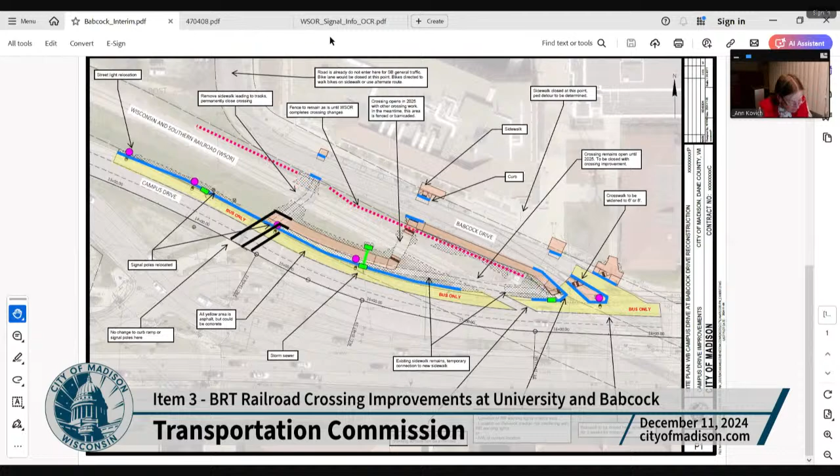All right, thanks much. So let's move on to item 4, which is the Safe Streets Madison Badger Road Sidewalk Project. Do we have anybody registered to speak on this, Aiden? We do not, no. Okay.

Mario, are you going to handle this? Yeah, I'll take this one. Let me go ahead and share my screen here. This is a Safe Streets project, the Badger Road sidewalk, near Park Street and Badger Road. There's a Burger King at this corner. To the west is the Park Street and Badger Road intersection. To the east is the new Black Excellence Center being constructed right now along Badger Road by the Beltline. This project is to connect these two, that new sidewalk with this intersection through the Burger King.

We initially budgeted this around $60K. It is just a sidewalk. But looking into the design a little more, we ran into a couple issues. Number one, that entire terrace is mostly private property where we need to go, so we're drafting an easement, and real estate folks said we have to buy the land for this easement. Based on the bank across the street that sold a few years back, it's going to be around $74,000 for that easement if those rates hold. Could be less, but we want to budget for the worst case scenario.

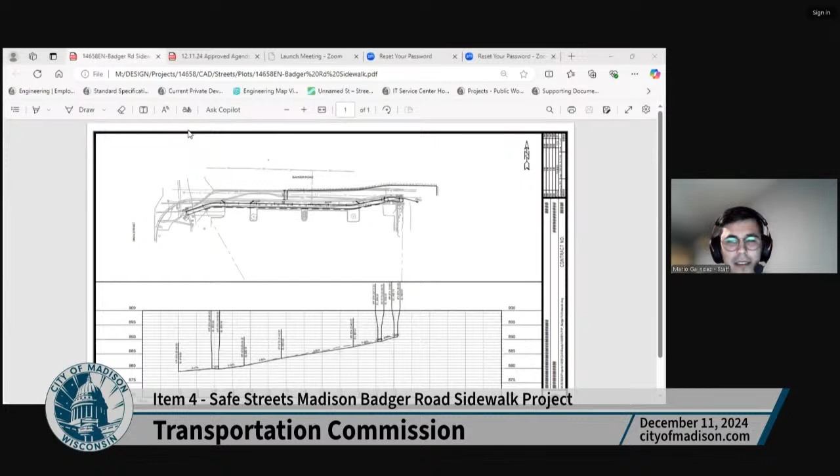I suspect, and Mario could confirm, that while perhaps we could narrow the approach and change the curve, that would probably just add cost right now if we're trying to retrofit something into what's there. So that's it, it would add cost.

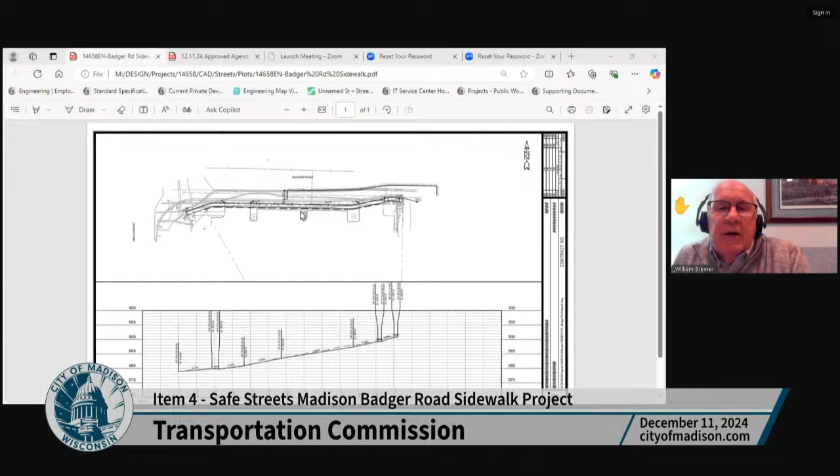Bill, go ahead. Could you just point out where the Burger King's lot line is on the east side? Is it at the top of the drawing, or is it right there? Yeah, right there. Is that their property line?

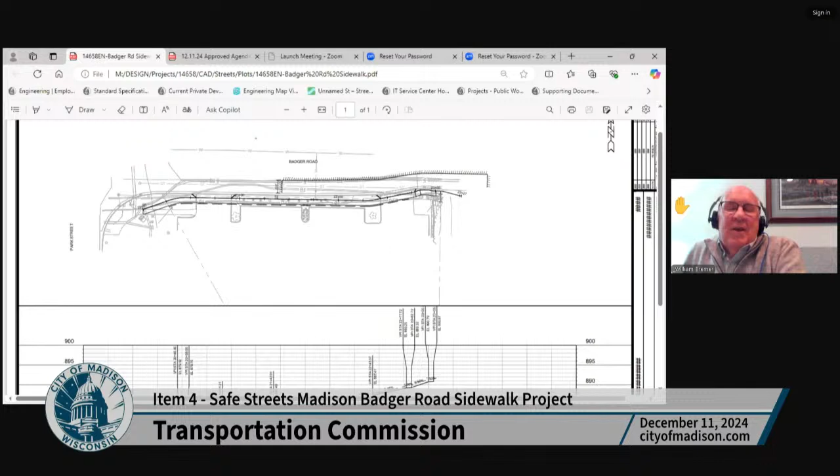Somebody's moving a cursor, I guess. Mario, are you in charge of the cursor? Is it at station 23+00, or very close to that, right there? Okay, all right. So, yeah, the sidewalk is gonna take up quite a bit of property. Yeah, thank you.

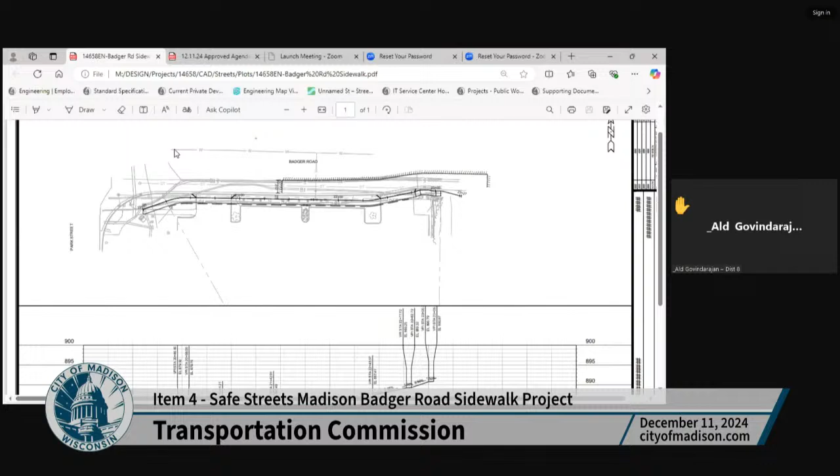Okay, other comments or questions? It seems like this is - Alder Govindarajan, go ahead. Thank you. I might have missed this if you guys mentioned it already, but where does the funding come from? Is this a general fund for this?

So this would come as additional funding from Safe Streets Madison. We would just need more than the 60,000 that came out, that was approved last year for this project. We would need to allocate 100,000-ish more. Okay, and it would come from the 2025 budget, correct? Correct. We have to do a full accounting for 2024, but it looks like that's all gone, so we would need the 2025 budget. Okay, thank you so much.

Capital budget, right. Harold, go ahead. Yeah, inspired by that question, would the project still have rated above the funding cut had the true cost been known?

So I would say this would be a little bit more like a couple of other big sidewalk projects, like we have one that we're doing over on the Stoughton Road frontage road to connect where the tiny house village is going, where it did score lower because of the way our scoring metric works for these projects. Once they get up over 120,000, they get a very low score, even if they have a high value. Okay, all right, thanks.

Bill, go ahead. Yeah, thanks. And I think I'm in favor of doing this project. I think it's necessary, particularly because we're having a significant improvement with the new center that's going in. I think it's absolutely critical that this sidewalk be in place when that opens, because we need to have pedestrians accessing both coming and going from that down to Park Street. I think it's critical, but it's a significant gap that needs to be filled.

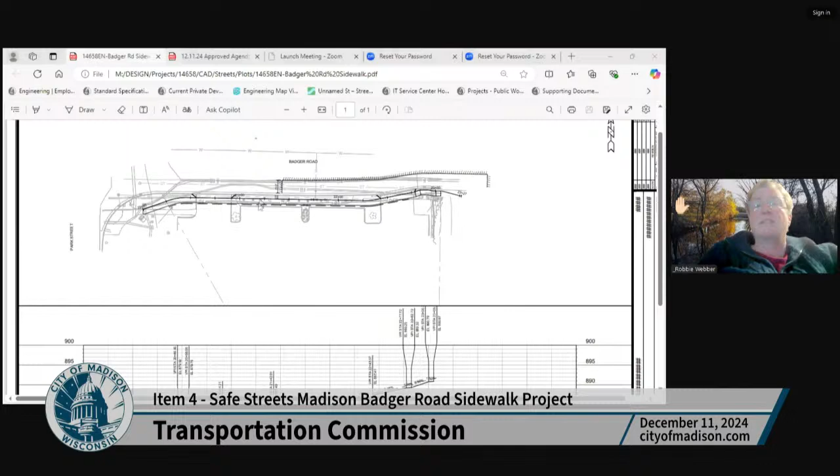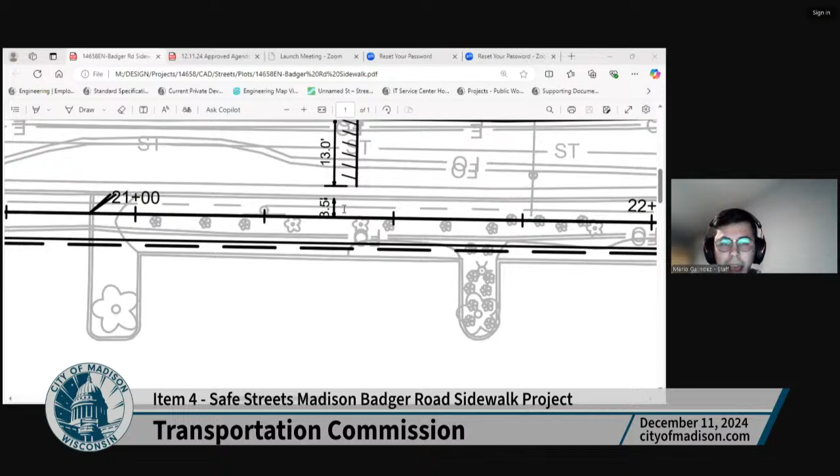Correct, yeah. Is the proposal to acquire some of the parking lot, or is the sidewalk going to be right next to Badger Road? The sidewalk is going to be about 3.5 feet off of Badger Road, basically right behind the curb. So we're still going to be within that planted terrace. It's all going to go away, basically, and just be a sidewalk.

But it will run through that terrace, and we won't have to take any of their parking lot. Oh, that's too bad. The reason I say that is that putting the sidewalk right next to Badger Road, I mean, it's better than what is there now, but it's going to be incredibly uncomfortable, I think, to walk so close to what can be a very busy road.

And I'm imagining the winter when plowing comes in and snow, slush, salt and gross stuff gets thrown up on the sidewalk, or you get splashed walking along the sidewalk next to the road. So anyway, I was just trying to figure out exactly where the sidewalk was going to be.

And it's really too bad that we can't, I mean, they've got such a gigantic parking lot. It's too bad we can't get some of their parking lot and move it to the other side of the planted terrace. Yeah, if we could take all of these spots here, that'd be great.

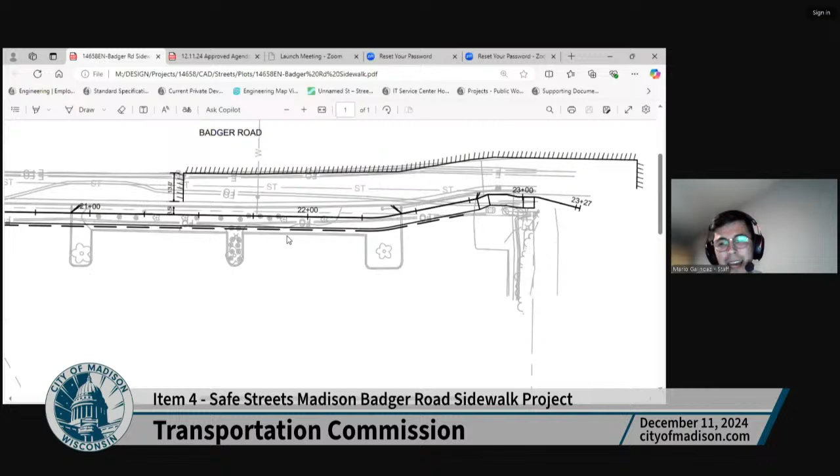I will say that it does kind of slope back pretty steep here from the street. So we'd have to kind of, we really don't like to put sidewalk below the street level, and that's what we would have to do. So I don't know if it would necessarily work, but in this case, I think the solution to the problem you're suggesting would be to bump out the curb into Badger Road, eliminate a lane, and just build the sidewalk the right way. But we're doing what we can, I think, in this scenario, unfortunately.

Okay, Chris Petykowski, you had your hand up? Yeah, just real quick.

We're trying to kind of do the minimum here to get the sidewalk in now. If we bought the full 8-foot terrace, we would be looking at damages for the parking lot and that sort of thing. So I do believe that if this property redevelops, then that would be the time when we would get our more standard terrace and cross section in there, typical section.

Yeah, I was just thinking about that, this might be some future redevelopment and we might be able to get something a little bit better. But thank you. Thanks, Robbie.

Pepe, go ahead. Thanks, Chair. I have a couple of questions. So, just like Robbie, this might be just me being really bad at reading this engineering plans.

But first question is, is part of the same project making or building, painting, etc., any kind of crossing across Badger Road, or is it only for the sidewalk on one side and connecting to the corner with Park and Badger?

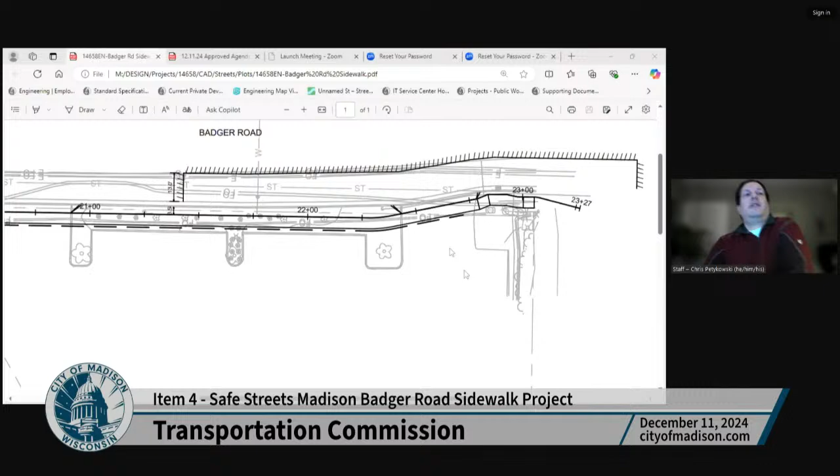Chris has his hand up. Yeah, so I think our long-term corridor view of Badger Road would be a multi-use path on the north side and a sidewalk on the south side, all the way from probably Fish Hatchery to Rimrock. And we'll be kind of implementing that through various projects.

You know, this is like one little piece of the sidewalk here. We have two TAP projects to build the path along Rusk Avenue and Rimrock.

And then we're working with the fire department and their project to the west of Badger Road to make sure that part is in. So over the course of 4 or 5 different projects, that would be the plan to build that cross section through.

Right, I remember a couple transportation commissions ago we looked at the one at Rusk and Badger in that corner. Remind me, Chris, did we talk about the sidewalk on the south side, or was that project focusing on the north side only? That was the north side only.

Okay, and is there still a missing link with no project accounting for that section, or are we hoping the new development takes care of that sidewalk on the south side? So between the Burger King and the Center for Black Excellence we'd get sidewalk all the way to the railroad bridge, and then we'd have to get it over, I believe, to our overpass.

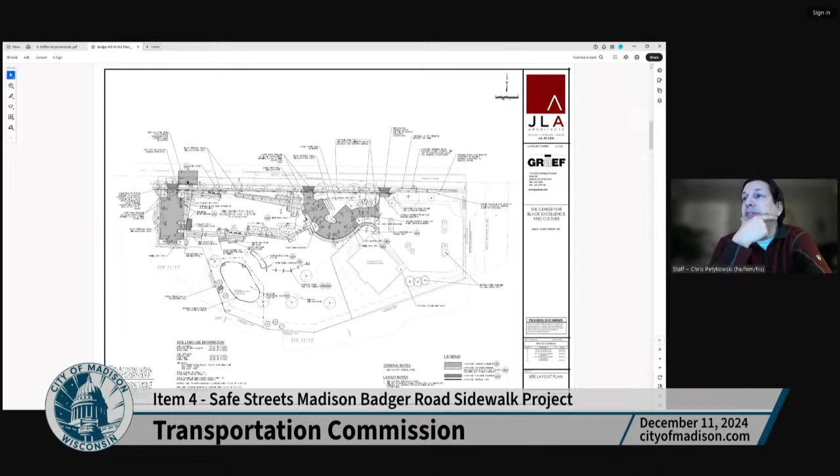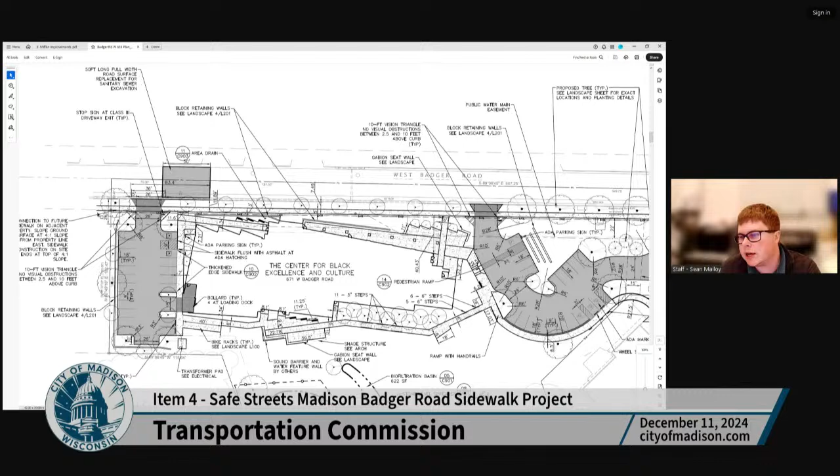This is the site plan from that development. This helps. So they're picking up sidewalks here ultimately, getting the sidewalk over to the overpass on the south side.

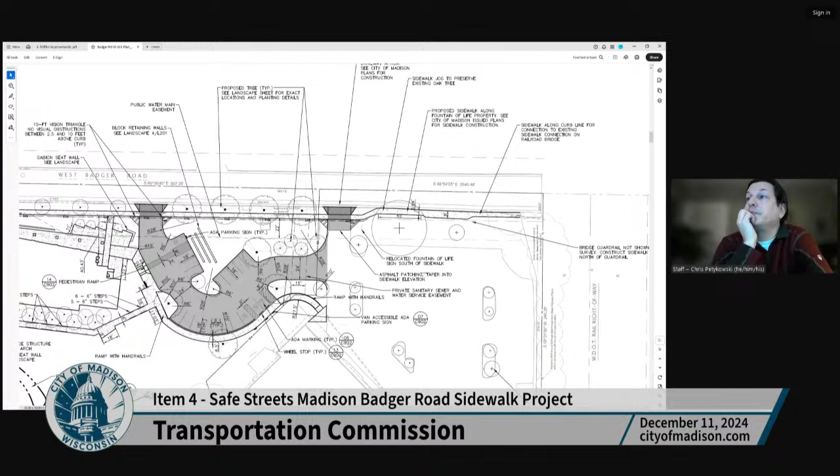Sweet. Yep, no, this is great. Awesome, thank you. Thanks, Pepe. Other comments or questions?

Because of the increased cost, we would need a motion to approve the project at the increased cost. Harold: I would move to approve the project at the increased cost. Bill: I would second that.

Okay, Harold, did you wish to speak to your motion? Yeah, this seems like an important gap filling project, especially with the new development happening there. And it's unfortunate that past decisions have made this more expensive, but it's still worthwhile. Thanks, discussion.

Okay, I'm seeing no hands. I'm going to assume a unanimous consent vote unless anybody wishes to vote no, abstain, or wishes a roll call vote. Okay, I'm seeing no hands, so the motion is carried. Thanks, everybody.

Okay, next item is review and approval of the TC annual work plan. I want to thank everybody for all the excellent suggestions we had back in late June when we reviewed this last time. It took a while to get back here for a lot of reasons, but as I went back through my notes and watched the discussion again, there were really thoughtful comments and excellent suggestions which have been incorporated into the changes.

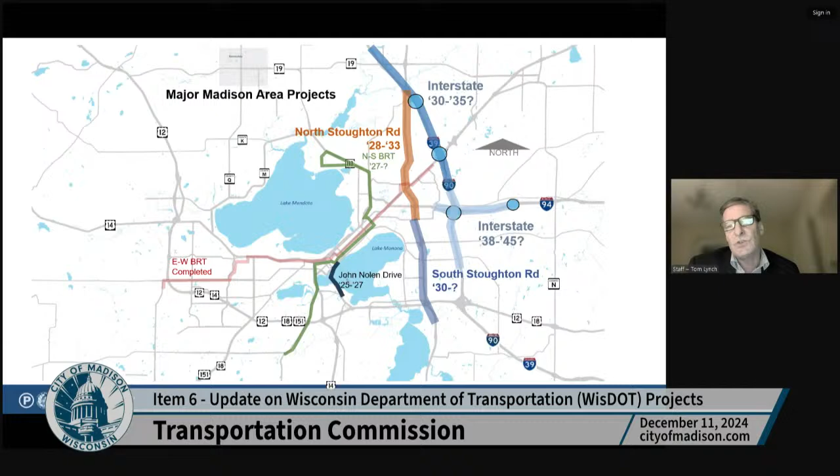But at least we can see pretty far down the pike of what's happening. North Stoughton Road is from '28 to '33, and South Stoughton Road is probably from '30 to who knows when. Let's start with the I-39/90/94 corridor study.

They just issued a final EIS for this project last week. It went before the Transportation Projects Commission Monday, and it was recommended for approval. It still has to be incorporated in the state budget before they can begin implementing it, but that will occur this summer. Key Madison area elements include...

Hoepker Road interchange, which many stakeholders in Madison, particularly in the American Center, really wanted. A revised 151 interchange, which I think I've shown you before, and you can see a picture of it here. While it's bigger and higher, it does introduce a more urban element for East Washington Avenue. So overall, I think there are some positive benefits to it.

A revised Badger interchange, and then a Milwaukee Street interchange, which would be in the 2040s. While much of this is way in the future, WisDOT would like to negotiate a cost sharing agreement for the Hoepker Road interchange in the first quarter of 2025. So that's pretty soon, even though this construction is way in the future.

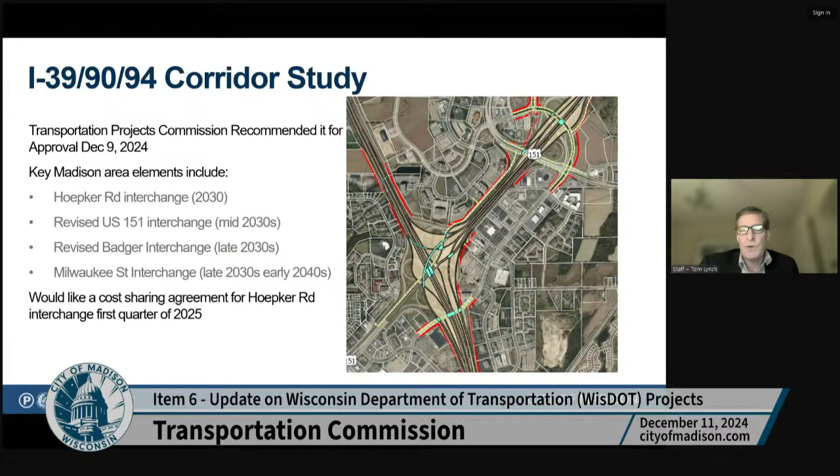The Hoepker Road interchange probably could occur between '28 and '32, and they would like to negotiate that. This is the recommended alternative there at Hoepker Road. Note that it just shows the interchange. And this project actually ends up being a bigger deal than just that interchange, right?

Because you have Portage Road, which is unimproved, that leads to the UW Hospital. And then you also have Hoepker Road, which is unimproved, which leads to Sun Prairie and all of that commercial area. So while they have a concept for an interchange, there's a lot of supporting infrastructure that goes on with that.

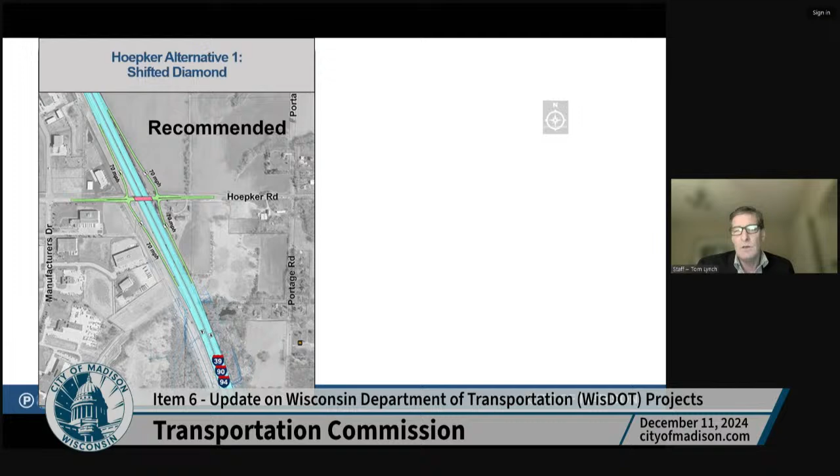The Stoughton Road North study - they released their environmental document, or it was signed last Friday, actually, I think Friday quite late. It also went before the Transportation Projects Commission on Monday.

It does not need the budget approval associated with the state budget like the I-90/94 project does, because it's part of their majors program, and it has a separate funding pot.

There may be things in this project that many perhaps might not like. However, I'm going to say that probably this project went as well for Madison as it could have. It could have been much more disruptive and had much higher impacts than it will.

Key elements of this on the North Stoughton Road, which is basically from Highway 30 to the north: there's one added lane in each direction. It has an at-grade intersection at the Stoughton Road East Washington Avenue - that was perhaps a major concession to Madison for that. They do have a separated shared use path on the east side of the corridor, except adjacent to the airport, and they have a grade separated ped bike overpass of East Washington.

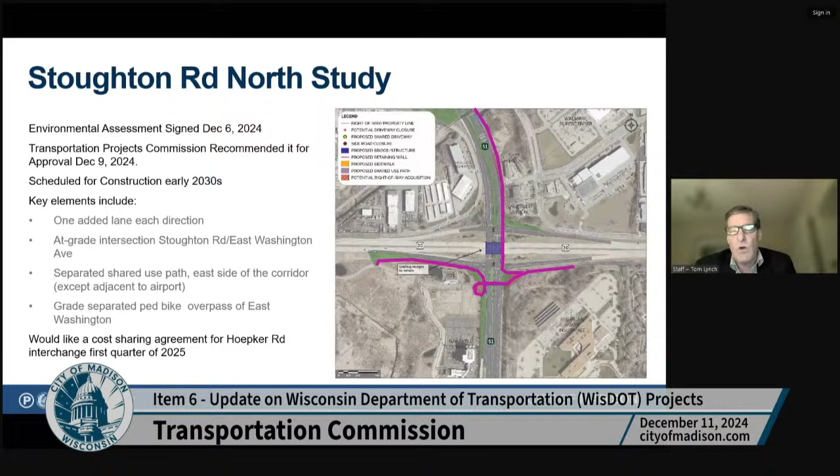So you can see on Highway 30, they have a grade separated crossing of Stoughton Road. Notice that they also have a path on the east side of Stoughton Road that leads up to East Washington. At East Washington, you can see that path that goes to the East Washington Stoughton Road intersection. There is a grade separated crossing, this one's above East Washington.

It curves down near where the Subway sandwich shop is, and then goes north. This has one added lane in each direction, and it's a rather large intersection. Compared to some of the other alternatives, such as diamond interchanges and the like, this one probably fits in best contextually to what Madison wants.

As I said, I'm not sure if I have another slide. I don't, so I'm going to go back up.

Tom, can we stop for a second? Tom Alderfield has his hand up. Yes, I can wait Chair if you prefer to take questions at the end, or I can go ahead and ask. Actually, I think I have a very small presentation on I-39/90/94 and a very small presentation on the Stoughton Road North study. The presentation on the South study is quite long and detailed, so this would be a good time to take questions.

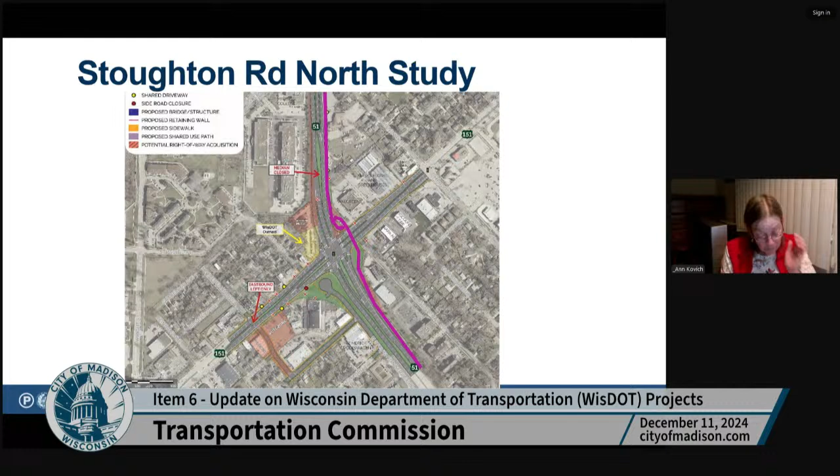As I said, WisDOT has been very focused on Dane County projects. We were hoping that after they got approval for the North Stoughton Road and the interstate, there'd be a slow period, but there's not. They're moving forward with the South Stoughton Road.

They had a public meeting that was very well attended for a Wisconsin DOT public meeting, I think two weeks ago at La Follette High School. I'll give you some information from that.

Right now they have about 5 or 6 conceptual alternatives. They'd like to narrow it down to 3 by this March, and then select a preferred alternative by August of 2025. And while that seems pretty far into the future, that's really light speed in DOT time, and light speed in educating the public about what's going on and how big these improvements could be.

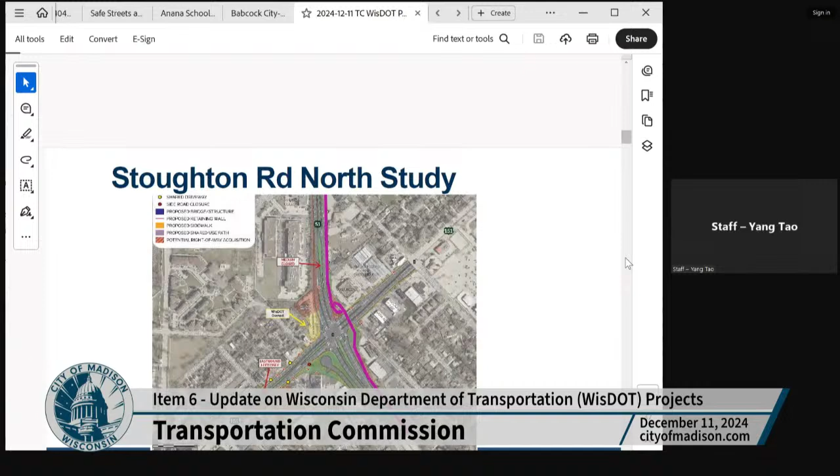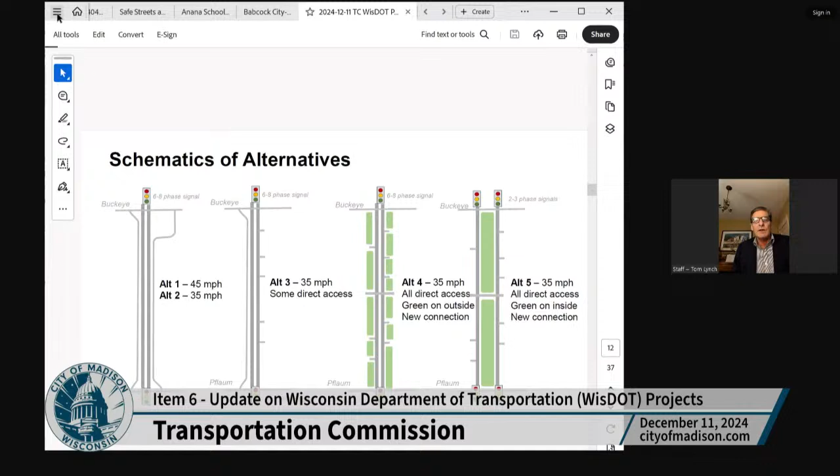Go to the next slide. Okay, so I was going to progressively disclose this, but there's really 5 main alternatives that they're studying. One of them is essentially the existing corridor, the way it is. On the left, you can see the schematic where we have a signal at Buckeye, a signal at Pflaum, and frontage roads on either side. The signals have relatively long signal cycles, like about 2 minutes.

Alternative 1 is at 45 miles an hour. Alternative 2 is at 35 miles an hour, giving a nod to some of the city of Madison's comments. Alternative 3 basically would keep the frontage road configuration on the west side, which would serve Blaine's Farm and Fleet and the like. But some of the lower traffic generators like Boomatic Pump, A to Z rental, and that kind of thing might have direct access on Stoughton Road.

Alternative 4 basically would create somewhat of a parkway, but it would eliminate the frontage roads, so we would have direct access. Businesses like Farm and Fleet or A1 Furniture or something to that effect would have direct access onto Stoughton Road. It would be 35 miles an hour, and the area taken up by the frontage roads would become open space.

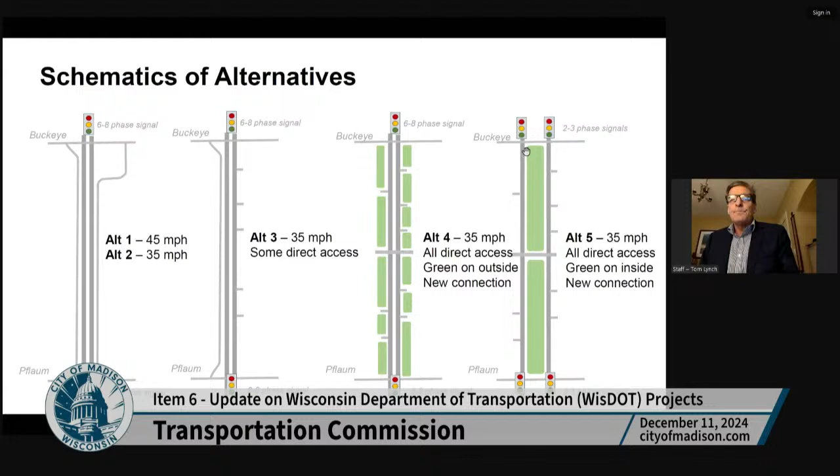This is a handout. When you want to try and figure out these alternatives, this slide provides a very good summary of the 5 alternatives being considered right now. You can see alternatives 4 and 5 both have direct access onto Stoughton Road. One places the green space on the outside, one places the green on the inside. Okay, next slide.

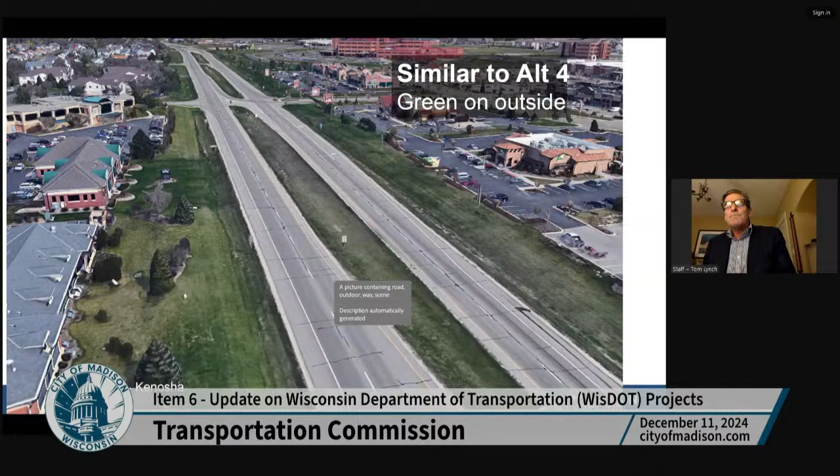This is similar to alternative 4. This one is in Bloomington, Indiana, I think it's called Miller Showers Park. You can see we have one-way streets on both sides with a path on the east side of the park, and then we have trees or something in the middle. Next slide.

This is something from a project I worked on when I worked for a different employer. I did the traffic analysis. This is Lick Run Greenway in Cincinnati, Ohio. It really functions kind of as a one-way pair, and you can see we have direct access onto the one-way pair with marginally spaced driveways.

In this particular feature, there's a drainage feature. I want to offer a taste of reality in that this is a beautiful picture, right? Probably we would not get something this attractive for Stoughton Road. We're probably not going to have a drainage way and walkways and the like, but we could have some type of green area that is more than a gravel shoulder.

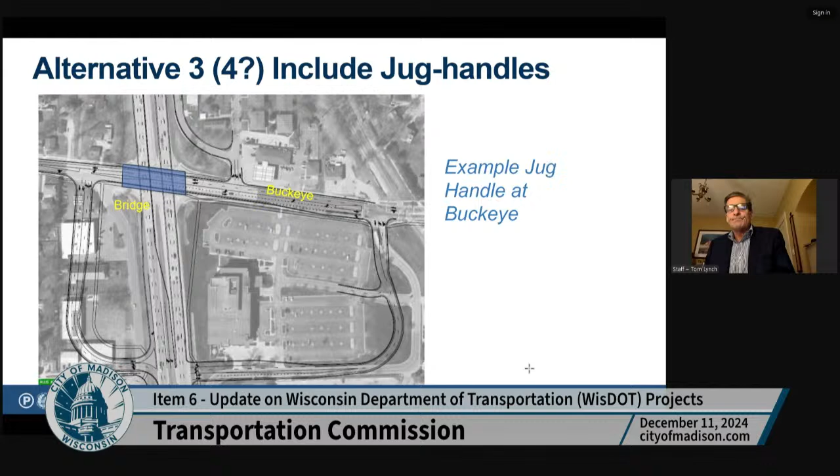Note that what the cross streets would do is make this into more of an urban street, right? But if you're in a neighborhood adjacent to Stoughton Road, you may not want all these cross streets. You can see how they would say, why would we want more cross streets? So there's a little bit of tension in that there's a desire to make this into more of an urban street, but a lot of adjacent neighborhoods are used to the way things are and wouldn't necessarily want to change the environment.

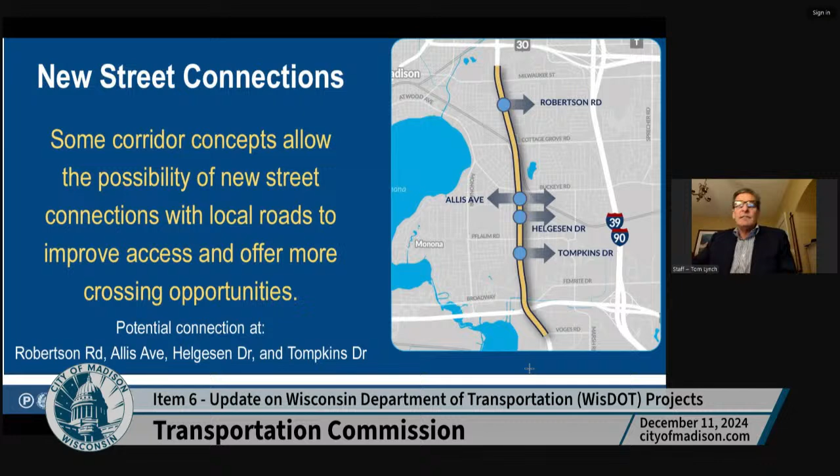One thing that was not included at the public information meeting, and we had hoped had been dismissed, was the concept of a super street. A super street uses a series of left ins and U-turns to eliminate the need to serve cross streets. So for motor vehicle operations, it's very effective at reducing delay on the main volume.

I think they can be confusing. I can provide a little bit more summary there with the next slide.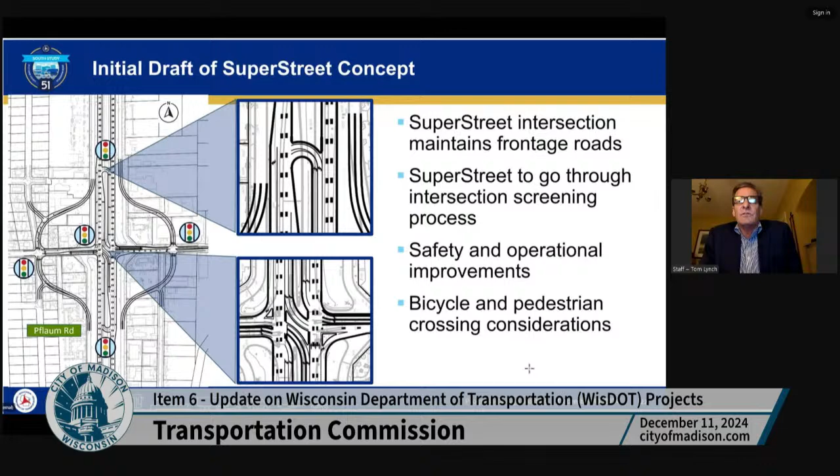This is a Wisconsin DOT slide. It would maintain the frontage roads. They say there's safety and operational benefits. There's also intersection benefits, or intersection considerations. Why don't you do the next slide, Yang?

I'll give you an example. I'm the father of 4 kids, and they're all out of the house and paying taxes and leading productive lives, and I'm glad for it. But I always think about what it was like when they were in high school. And so this is the attendance shed for a La Follette High School student, right?

You can see it in orange on the right. A student driving to school at La Follette, which is that orange rectangle, would travel west on Pflaum Road. They would take a right, then make a U-turn, and then take a right again.

So you can see that it doesn't cross. In some ways, I want WisDOT to be fair to us and the things we're asking them to consider, so I want to be fair to them as well. This does provide operational benefits, but in essence it almost separates the west side and the east side of Stoughton Road more, because you can't go across anymore.

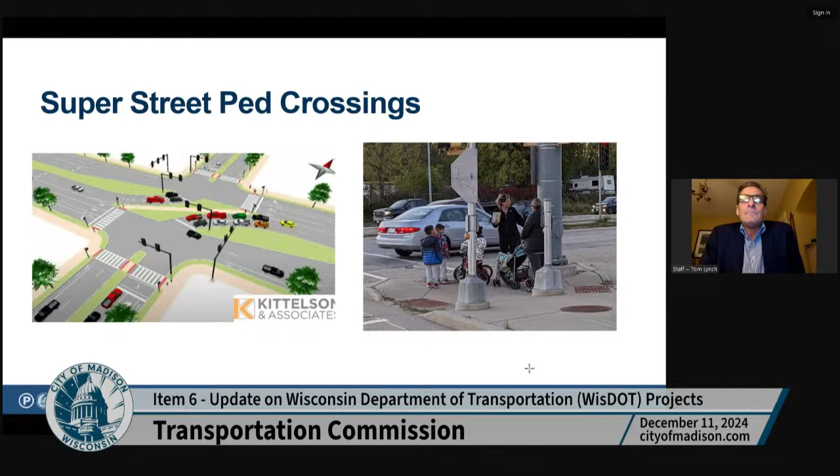Next slide. WisDOT and the public positions are really quite varied. Some can accept a lower speed facility, some are advocating for maintaining mobility. I'd like to say that WisDOT has given us unprecedented access into their process. We've probably been invited to anywhere from 15 to 20 design meetings for this project, which is quite a bit.

WisDOT is not a single body, it's a group of people, right? The people in the Southwest region are very accepting of some of our suggestions and responsive to that. There are some people in central office, more responsible for the full statewide picture, who have strong reservations about what Madison is asking for. Next slide.

WisDOT places a strong emphasis on what they get on these little Survey Monkey surveys. We think, oh, you got a Survey Monkey and you got this - that doesn't necessarily reflect the city's position, but I think WisDOT believes it really does kind of reflect what many people in the city think. This is a survey they conducted post-PIM.

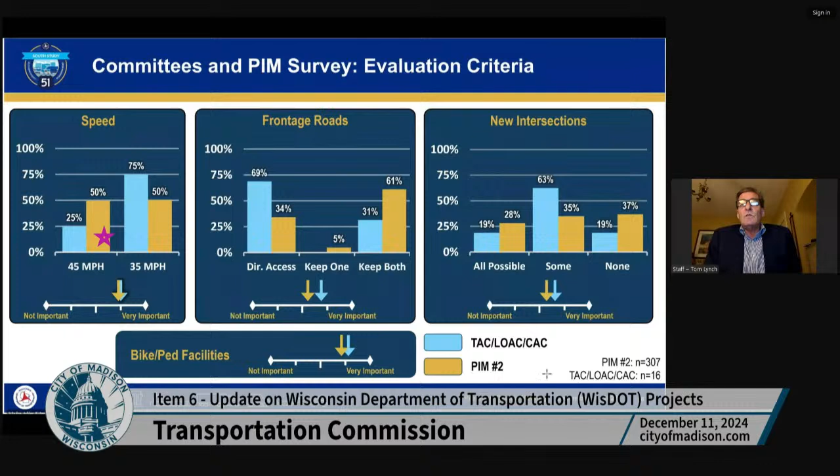This is interim results, not the final survey. Next slide, Yang. This survey is still open. You can take this, and I think that QR code will work. I developed that last night.

Like the Transportation Commission, you guys have a voice in what happens in Madison transportation, right? So if you feel like there's value in having a slower Stoughton Road, I would encourage you to take the survey, because as a Transportation Commission, you probably understand the transportation issues facing Madison more broadly than someone who is just used to seeing transportation from a small portion of the city. We will probably respond to WisDOT on these alternatives in an official capacity, but they do place a lot of emphasis on what these survey monkeys show. So I would encourage you to participate if you have feelings regarding this. Next slide.

The staff recommendation right now is that we've been advocating for a slower, more urban facility. We believe that alternatives 4 and 5 probably have the greatest potential to meet this objective. We might have a slight preference for alternative 5 just because having 2-phase signals, that one-way pair, is kind of an attractive operational concept, but we could see 4 as well.

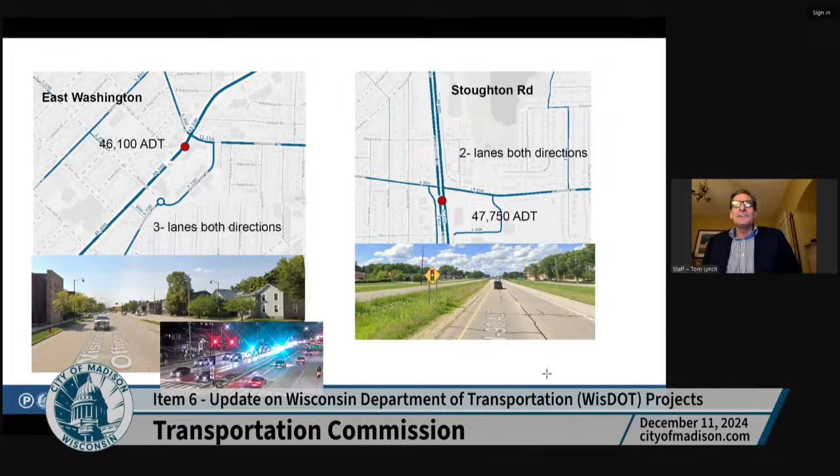And then we have a bunch of exercises, which we're not going to go into. So if we could go, Yang, to that one slide that shows all 5 alternatives - that's probably a good one to have up on the screen while we answer questions and have discussion.

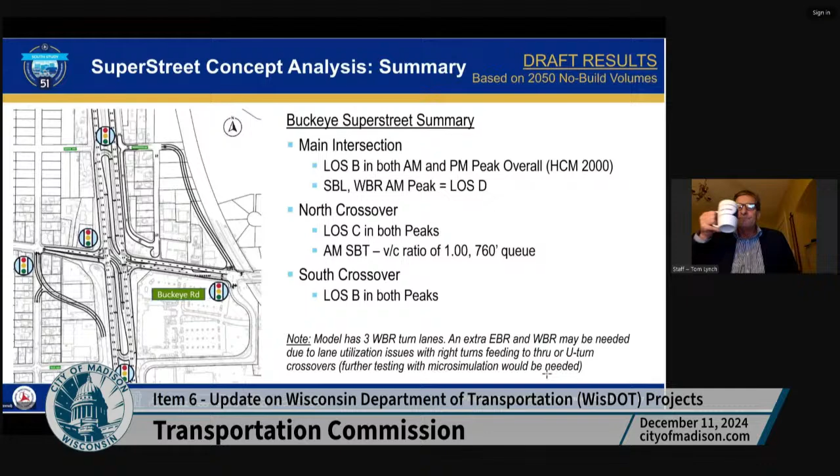Okay, why don't we hear from the public first, Tom? That'd be fine.

Aiden, who do we have registered to speak? Gabriel Hill of Presidential Lane neither supports nor opposes and wishes to speak.

Hello, can you hear me okay? Yes, we can, go ahead. Hi, so my comment is mostly in regards to this South Stoughton Road part from 18 to 30.

And all the options seem pretty bad. The no build option, option 1, and option 2 all don't address what I think - I don't want to put words in the alders' mouths, but I think they talked about more just a desire for connection across the road between districts. I had it pulled up.

Then alternates 3 and 4 just turn Stoughton Road into a design similar to the roads that consistently appear on our high injury network. It would create way more conflict points, both for turning vehicles and pedestrians, just in general. Options 3 and 4 would turn it into kind of another - I want to say like East Washington, where it's prevalent on our high injury network.

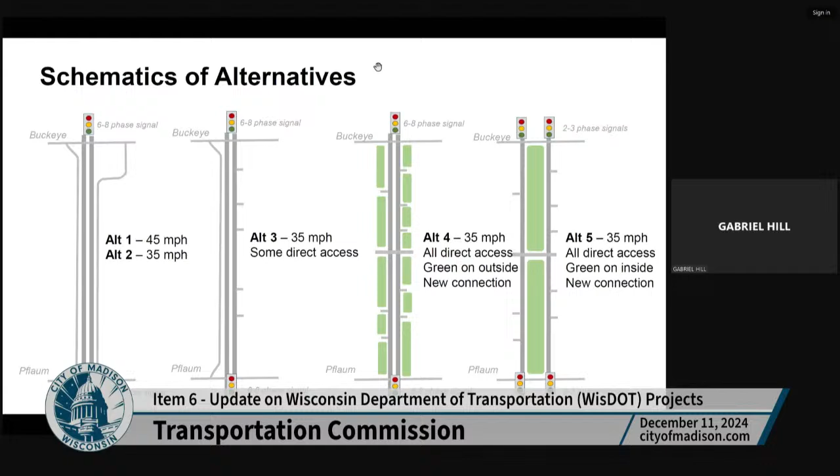What I'd like to see as a goal for this area is to try to bump any through traffic out to I-90, where it really needs to be. Like if you're going from, say, Stoughton or McFarland, and you're going north of Madison, you really shouldn't be taking this road. It doesn't make sense to have it go through the city when we already have a bigger, better, faster road that is almost the same time right nearby.

I'd also like a goal to allow the interconnectivity across the road that the alders have asked for - again, I don't want to put words in their mouths. Keep the safe street and allow space for local trucks to still have access to businesses, and reduce the size of the road to a size that fits the needs.

Now, I'm not a traffic engineer, but I think reducing the speed limit to 40 or less would be great - this would make Google Maps route people up to I-90 if they're going through. A reduction to 1 lane in each direction would be great. And on Pflaum and Buckeye, add grade separation, like was talked about in the project - that would be excellent. Or if that's too expensive, then the truck-friendly roundabouts that we see out past the Beltline on Mineral Point that they added. I don't know whose district that falls under, if that was us or the state that added that.

But also narrowing the frontage roads could be done. Nobody really parks on those, and the traffic is minimal for their size. I think Dutch-style frontage roads could allow for better access to the businesses for both trucks and customers.

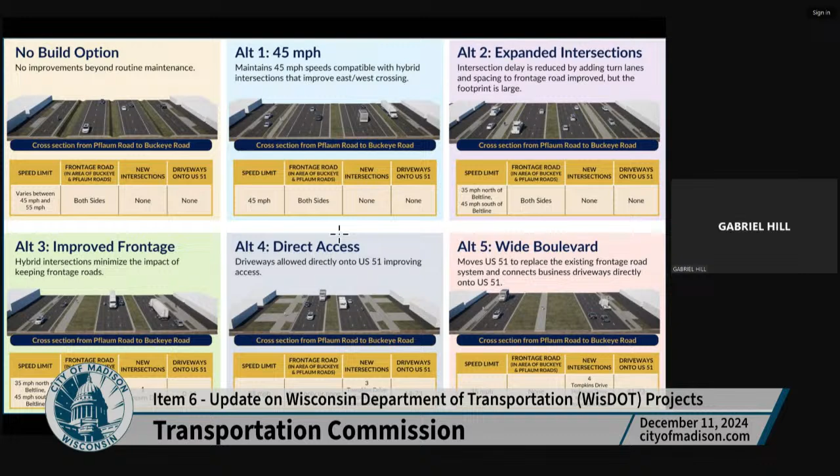Sorry, I have more - yeah, but my time is up. That is your time, thank you so much.

Questions for the registrant?

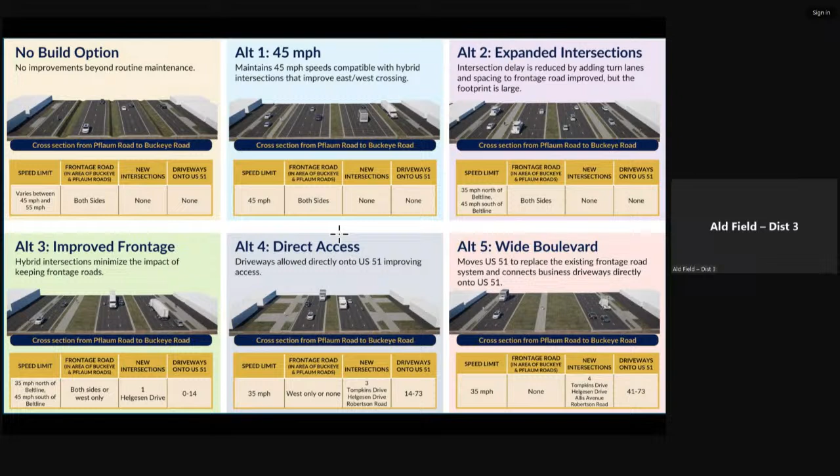Okay, I'll probably start an email thread between Chris, yourself, and I, and talk through this more. Thank you, Tom. Thanks, Alder. Alder Martinez Rutherford, go ahead.

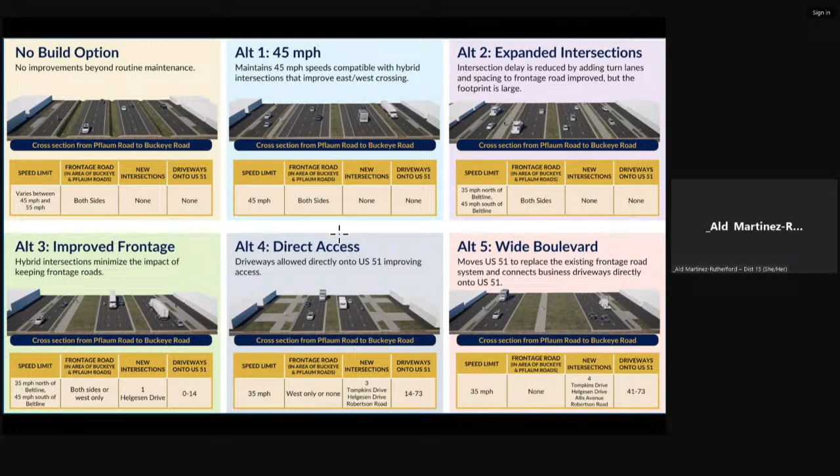Yeah, Tom, I probably missed this because ADHD and everything, but the only place that I really saw pedestrian infrastructure was when you showed the super street, which seems terrible, by the way. But I'm mostly concerned about getting students across the street safely back and forth, especially around Pflaum. Are they taking that into consideration?

Yeah, so I'll talk a little bit about it. All of the alternatives will have much better longitudinal bike-ped accommodations, and they will be protected. I think they haven't developed them exactly, but they would be consistent with all ages and abilities, right?

I think the cross streets, what you say is correct. That's more challenging. When you have an at-grade intersection, it's very difficult to get students across, or any pedestrians across, right? If you have a jug handle or a grade-separated intersection, all of a sudden the conflict exposure is quite a bit less. But then all of a sudden you have a different type of facility, right? You have something that borders on an expressway, not an urban roadway.

So I'm going to say the executive branch of the city has tended to prefer more urban, at-grade solutions. Both are kind of things that could be explored. Easier crossing for peds and bikes if you have a jug handle, but then all of a sudden you have an expressway type of facility.

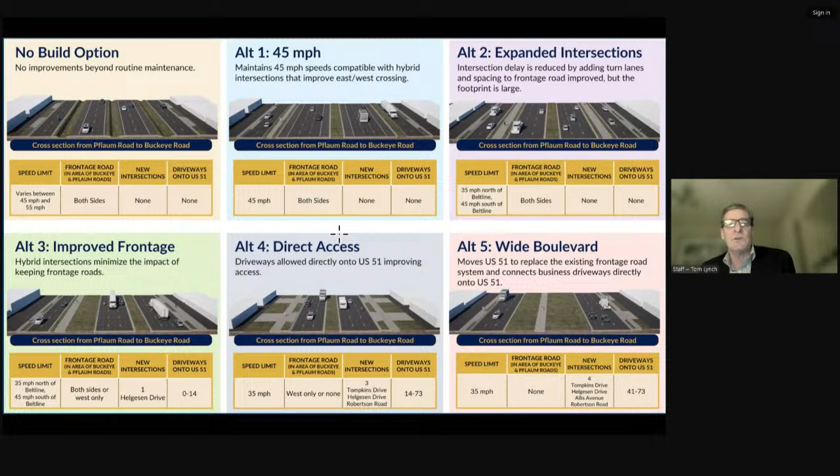Which I guess if we had our druthers, that's not a bad thing for us. Having less traffic volume in East Washington is probably better because we have more urban concentration there. So thank you for allowing me to address those.

Yeah, no, helpful information. Other comments or questions for Tom? And feedback on what you prefer. Harold.

Yeah, thank you. Lots of projects, lots of material to digest. I'll start with the North Stoughton Road study. Can you clarify the bike path? You said there will be a bike path, but there will not be one along the airport. Is there a map of this to figure out?

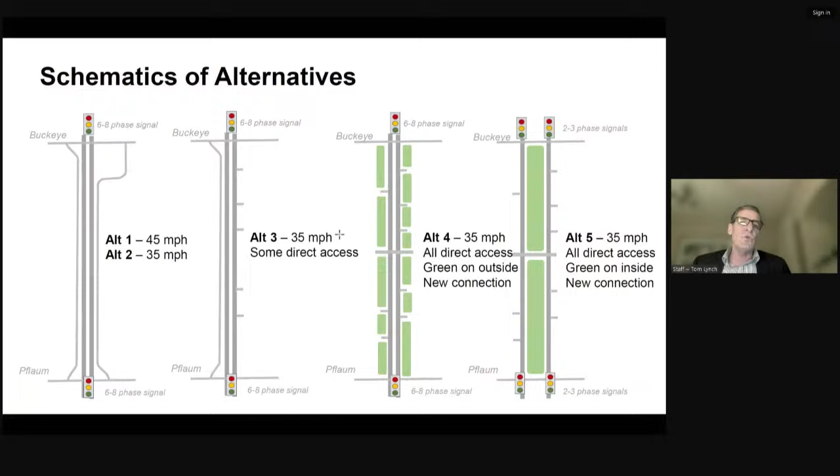There is, and if you email me I can perhaps provide you that. I think we have consistently said that we wanted to provide a path adjacent to Stoughton Road, similar to what occurs on Highway 12 to Sauk City. It's not a great place to bike, but it's a safe place to bike.

The airport has consistently said that we can't have a path because it introduces a new use. It's been our position that there are already pedestrians and cyclists on Stoughton Road, particularly in the runway clear areas, because UPS has a new facility on North Stoughton Road with shift work, and people sometimes have to walk to that shift work, which is terrible.

I think federal agencies have deference to federal agencies, and so the Federal Aviation Administration has kind of said to FHWA that you can't do this—it violates our standards, and so we are not going to allow that. That's what the airport has said. We have not been able to push that because of the current dynamics with the airport, the county, the city, and the state.

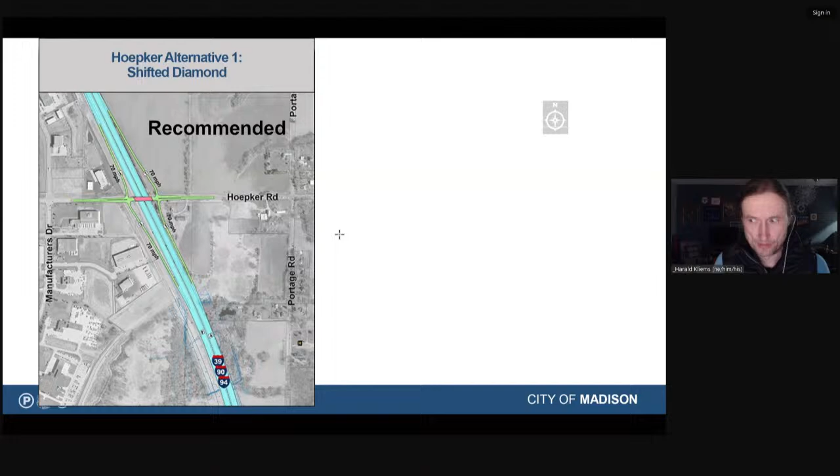Next, so Stoughton North is also adding a lane, a general travel lane. Is that correct? It is, yes. Even though volumes are drastically lower, and even WisDOT's often optimistic projections for travel volumes say it's going to be like 20-something thousand, and they're still adding a lane. Actually, I think it's much more than 20,000.

I'm writing down airport in my notes just so that, but I'll still forget. So you still should email me. Will do.

I think Wisconsin DOT's first the traffic forecast—we like to blame it on Wisconsin DOT, but really they're our traffic forecasts, right? They are prepared by the Madison Planning Organization, which is kind of separate, but underneath the city of Madison. The people that prepare those traffic forecasts are competent, they do their job well. I think what happens is that the city of Madison is willing to live with more congestion than what Wisconsin DOT is willing to live with, as well as what FHWA is willing to live with. Whereas we are saying, well, if there's a roadway in the border, if we can reduce capacity, the city of Madison will say, let's see if we can do it, maybe it's not that bad.

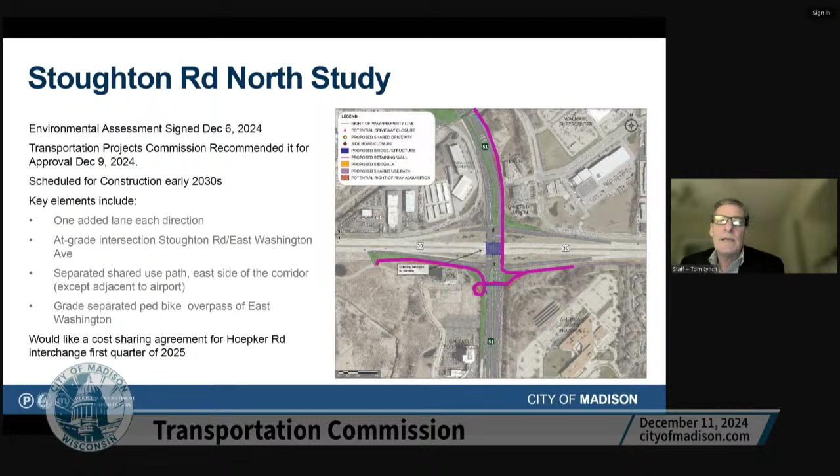I'm not sure if I have a detailed PDF of the proposed lane configuration. You can see even with this graphic right here that came out of their environmental document, it's somewhat pixelated, so it's difficult to see exactly what's happening. But right here, if you zoomed in, you could see that we have 3 lanes in both directions, not 2 lanes in both directions.

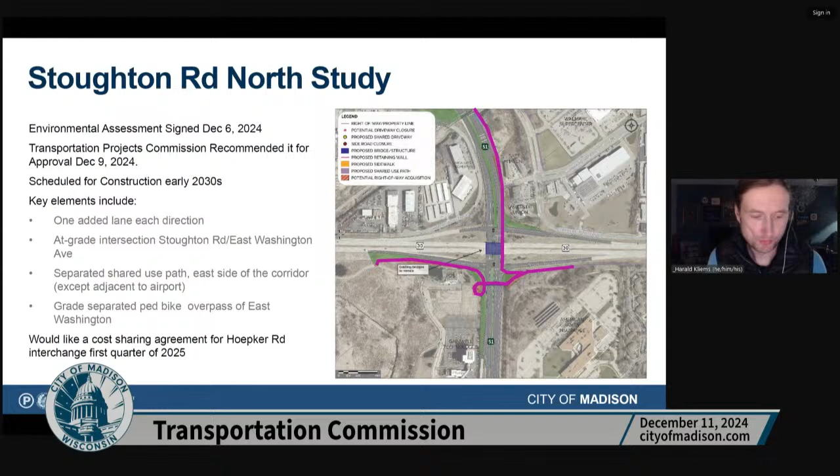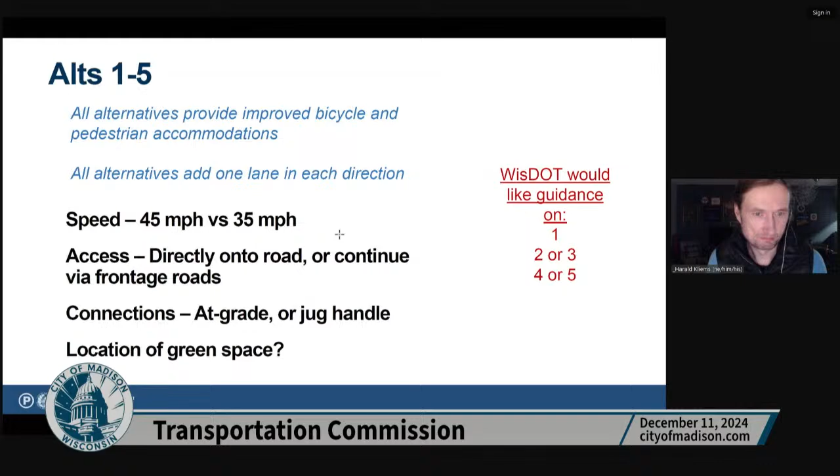Yeah, I guess feedback on the alternatives - I think getting rid of the frontage roads is a good thing. We definitely don't want to have a 45-mile-an-hour 10-lane, like 6+4. That seems bad. It seems very unfortunate that we get all this new green space, but it will be

wasted space and not really change the feel. I mean, if there is any possibility that that green space could be used for something, it seems like it might be easier in Alt 4, where, as you said, the area plan is being developed. As those properties redevelop, if you suddenly have an additional, I don't know how many feet that is, that could

maybe be gradual - that seems maybe slightly more realistic than having that island and doing something with that. But if that's not feasible anyway, then I'm not totally sure if I find your argument about the signal phasing for the crossing a pretty strong one, even though I don't like what it looks like in Alt 5 necessarily. I have great concerns about the crossings. I mean, WisDOT says it's about safety and mobility, but for whom? Really seems to be for car occupants primarily.

And I'm just looking at those design alternatives, thinking about what it's like to cross. I mean, I know what it's like to cross there now, and it's hard to imagine the new options making it much safer or more comfortable for people going across. As you said, north-south seems like a great improvement, but the crossings are not, and probably Alt 5 might open up some possibilities more so. But yeah, it's not great. I'll leave it at that for now. Thanks.

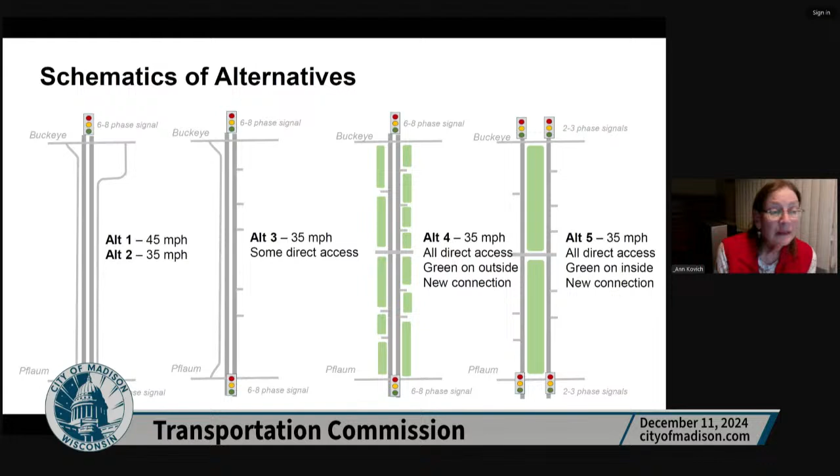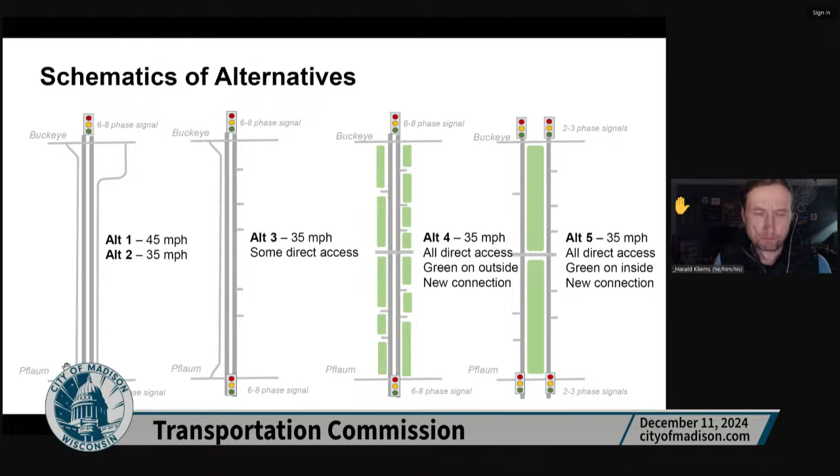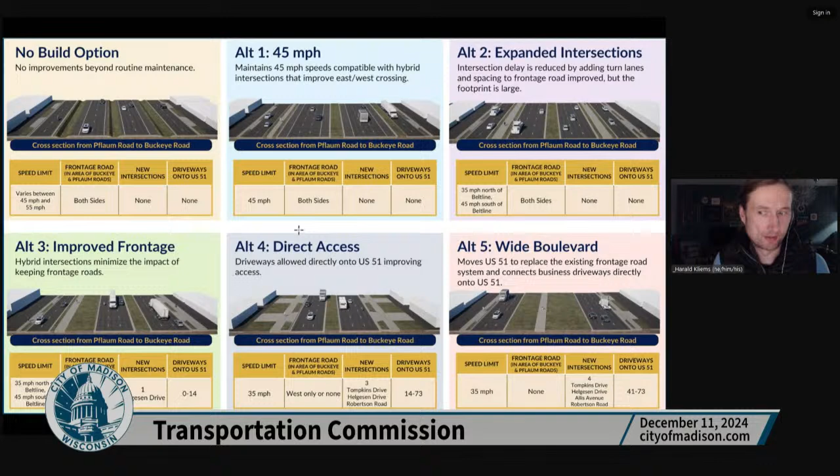Along somewhat similar lines - if you could go to the next slide with the renderings of the 4 or 5 alternatives. Yeah, that one, perfect, thank you. I don't want to overinterpret this, or maybe I'm squinting too much, but I'm noticing that the paths vary between the alternatives. So when you provide feedback to WisDOT, make sure that, for example, if Alt 5 happens, it seems like the only white path is the one in the middle - what happens at the intersection, whereas on the side it looks like only regular sidewalks. So making sure that in any configuration we have two-way bike paths on both sides of the road is really important, because the crossings are going to be difficult. We have to ensure two-way mobility and access on both sides - there should be plenty of space to make that happen, unless you have even more frontage roads, I suppose.

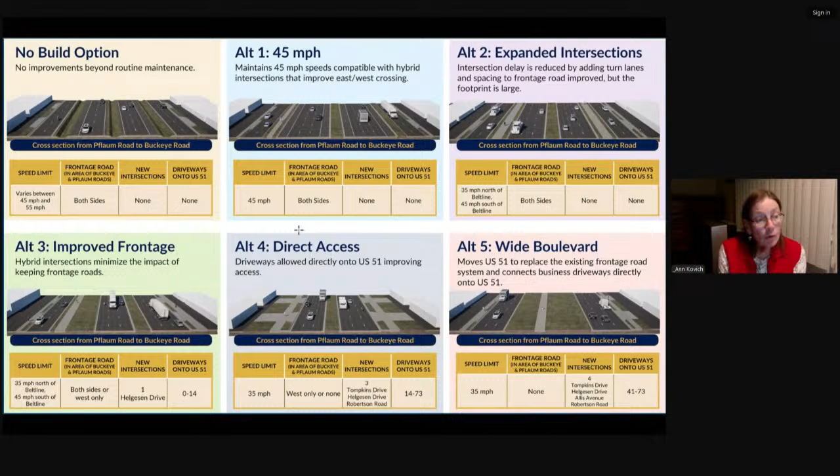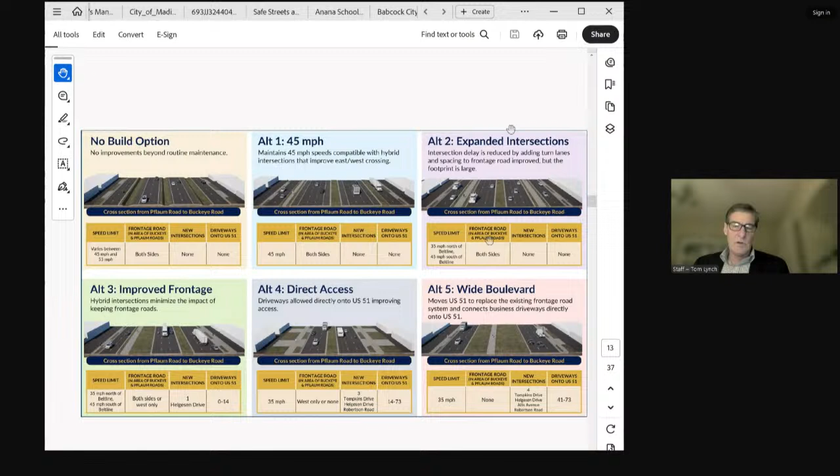No, maybe just I'll alert the commission that we'll probably send a letter to influence the DOT in the next month, to help them screen. I would encourage the Transportation Commission that if you have opinions, do the survey, because WisDOT takes those surveys seriously. And then maybe just a foreshadowing that we will probably have to negotiate some type of cost sharing agreement with the state.

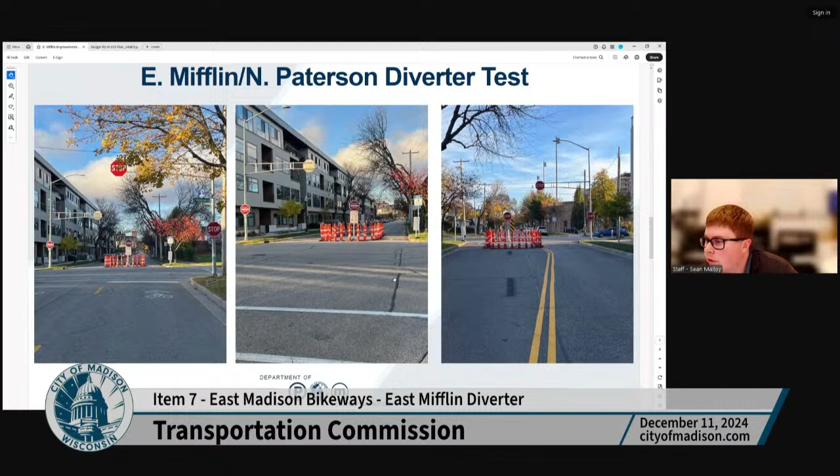So that was kind of the data. We also had the survey. We had a little board out there — we put out a sign with a link to the survey, so people that were biking were able to find the website and go to the survey, and a lot of people did. There was a QR code that worked for a while that people were able to scan, or they could type in the website link. So we put that out so it was easier for people to fill out the survey.

We had about 136 people fill out the survey. It was actually pretty much about what we expected. A little less than 50% were biking. Looks like about 35% were driving a motor vehicle, and then the rest were walking.

The majority of people traveling was by motor vehicle as well. So that was kind of question 2. The big one I want to draw attention to is question 3, where we just flat out asked, do you support the diverter or not? We got about 60% of the people voting to support the diverter, and about 35% opposing, and 5% said they could live with it. So I assume they didn't really have too much of an opinion.

We have some other potential improvements that we're looking to do. Like I mentioned earlier, we have $125,000 to work with. So we estimate the diverter would cost around 30 to 40,000. That would leave us some more money to do other improvements.

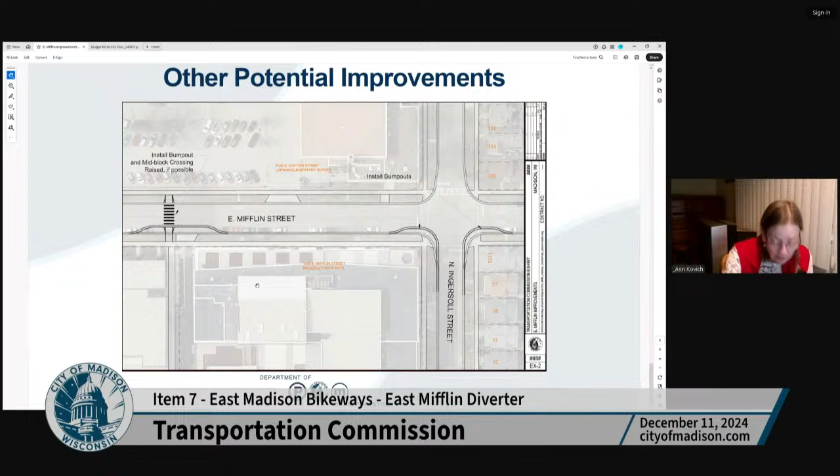Let me just clarify, what about the rest of the East Mifflin Bike Boulevard improvements you were talking about? Yeah, I think ideally the installation of those two improvements along with the wayfinding would be ideal to include. I think the diverter was the bigger question, but ideally we'd have everything approved, and then we'd enter into final design work on all of those so we can get them contracted out and built. So it would be you're asking for approval of the East Mifflin Bike Boulevard improvements — would that be the right way to say it? Yeah, I think that would be fair.

I guess to add on to that, because we had another option before, last time we came here, I think approving this diverter option would also be what we're looking for, or what we'd recommend. From what we saw, this seemed to work pretty well, because bikes didn't have to weave with cars — they were able to stay on the right and go through instead. I thought it worked out a lot better for that. But if there's a preference for the other option, we could do that too. Just a preference on the option would be good.

So, let me summarize and see if we have what you're looking for. You're asking for a motion to approve the East Mifflin Bike Boulevard improvements, which would include everything you talked about, including the wayfinding, along with the recommended East Mifflin diverter design. Would that be right? Yeah, that's it.

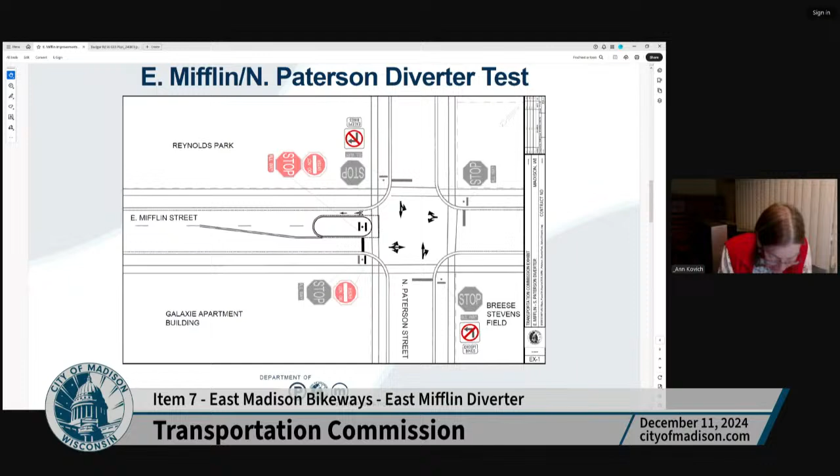Next, item 8, we have a reminder to commission members of the annual statement of interest form. This is important because you are required to file a statement of interest every year. The filing deadline for this year is January 7th. My email came on November 22nd, and I'm assuming everybody else's came on the same day. The key thing is that failure to submit this statement of interest will ultimately lead to revocation of your committee appointment. So everybody, please go ahead and fill that out.

Kaylee, I don't know if you have to fill it out again, but they mention in the email that even if you filled one out earlier, if you get an email from the clerk asking you to fill it out again, they apologize, but you might have to do that. So just watch your email for that, Kaylee, to see if you get anything from the clerk asking for another statement of interest form. Does anybody have any questions about it?

Eric is on as well. I have seen people kicked off BCCs because they didn't file their statement of interest form, so it's real important that you do that.

Pepe: Just a quick reminder, who is this email coming from? My email gets so much spam. Chair: It came from clerk@cityofmadison.com. Pepe: Gotcha, that's gonna help me find it. Chair: It came to me on November 22nd, from clerk@cityofmadison.com.